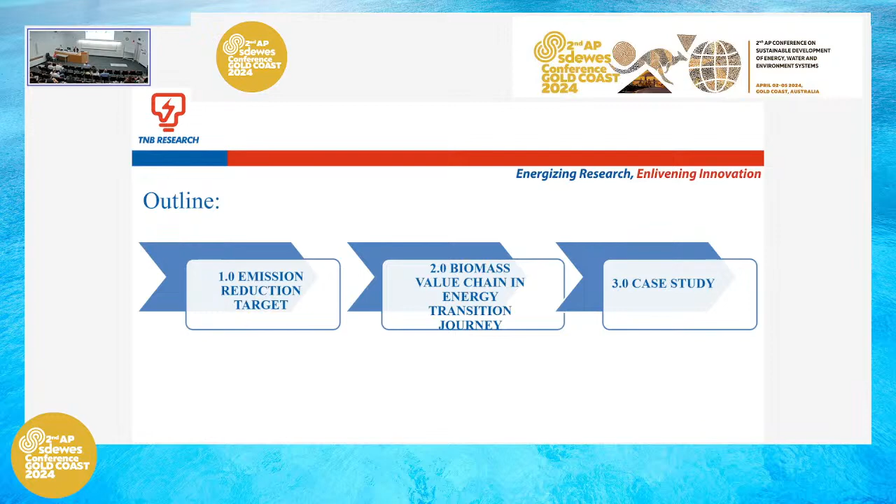Okay. Thank you, Prof. Navin, for the introduction. So I'm Suzana. I want to share today on the biomass value chain for the energy transitions. There are going to be three scopes of my presentation. First, I will talk about the motivations. What is the drive? What is the global and national target? And then I'll go through the biomass value chain perspective, specifically in the energy transitions, and then I will share about our case studies.

So we see now people are talking about climate change, the increasing CO2 being emitted. So more initiative strategies need to be done in order to prevent increasing rise of temperature and further to prevent emissions of CO2. Based on the IPCC report, we need to reduce 45% of these greenhouse gas emissions by 2030 in order to prevent an increase of 1.5 degrees Celsius.

So where are we now? We are 1.1 degrees Celsius above the pre-industrial level. Meaning that there needs to be a concerted effort and strategies globally and nationally in order to mitigate these emissions of CO2. And Malaysia also has made a pledge, a commitment to reduce the intensity of carbon emissions by 45% per GDP in 2005, in comparison by the year 2030.

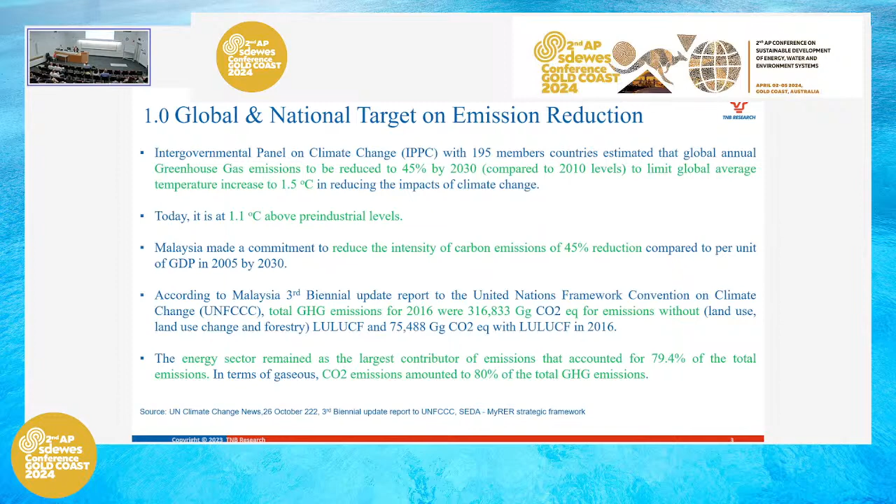So from a Malaysia perspective, we have to come up with roadmap strategies on how we can move forward to support this initiative. In the Malaysia scenario, the emissions of CO2 in gigagram CO2 equivalent, the energy sector is the largest contributor. So what I'm going to share today is the roadmap of Malaysia and how the industry combined effort to achieve the KPI, and I will give some light on the case study where we are positioning utilization of biomass as our power resource fuel.

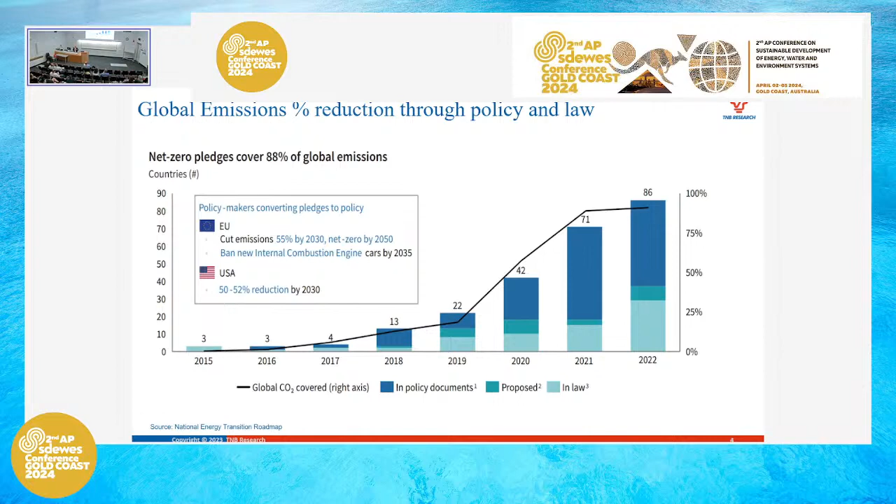Okay. We saw yesterday and today the talks on policy. When we look into these situations, it can be a bottom-up approach and also a top-down approach. When we talk about the top-down approach, the policy is important. In Europe and US also, there are certain targets to be reduced by a certain year. And this is where we see increasing policies being announced, implemented, as well as laws in order to ensure the target is met. So a global effort and strategy is very crucial to move towards net zero emissions.

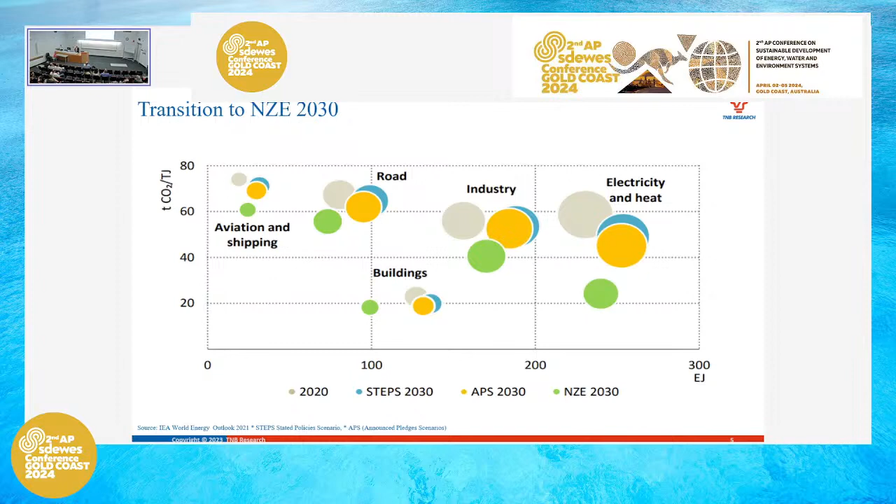So here we can see the importance of policy in shifting these reductions of CO2 emissions for all these sectors. We can see that more needs to be done, especially for the electricity and heat sector, where you can see that it takes the bigger chunk of the CO2 emissions. And here, with the pledged policies and announced pledges, with the implementation of all this, we hope that globally, in all these sectors, we will achieve a reduction in CO2 emissions and move towards a net zero target.

Right. So TNB, this is the company where I'm working. It is Tenaga Nasional Berhad. It is the main utility company in Peninsular Malaysia. So in Malaysia, we have East Malaysia and West Malaysia. So this company is the key, I think the prime player for utilities for the country. So the idea of moving towards net zero has been there since 2016.

So the company set specific targets for us to achieve, meaning that by 2025, they are introducing more renewables and their target capacity for renewables to be deployed. And also the company has subsidiaries, including a renewable subsidiary. And where I'm coming from, I'm from the research center that supports this energy transition journey for the company to meet their strategic directions. And then the target by 2035, because right now coal is one of our prime fuels used to produce electricity, they set a target that by 2035 they want to reduce emission intensity by 35%.

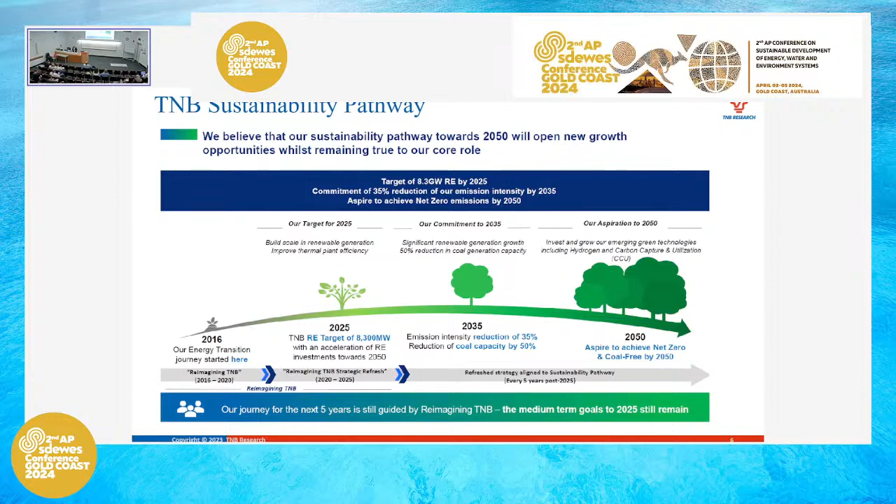Then how to do that? Meaning that utilization of coal is to be reduced by 50%. So then it prompts us to ask what alternatives there are to complement or fill the gap in terms of fuel supply. So this is where biomass comes in, because this is one of the approaches or solutions that can be offered in the short to medium term, as low hanging fruit. And then the long term is to achieve net zero and be coal free by 2050. So this is where technologies are important. We are exploring various technologies like CCUS and also other technologies such as hydrogen that can move us towards these directions.

Right. So as I mentioned, in the Malaysia scenario, strategy needs direction, right? So here, the country came up with the National Energy Transition Roadmap last year. With this, the government hopes to accelerate the transition from fossil-based to renewables. So they have in place the NETR, the National Energy Transition Roadmap, and also a National Energy Policy. So with these two governing umbrellas, this is where we go back to the question of which sectors we can further improve, or what will move the needle.

So here, energy efficiency is one of them and is very crucial, and also renewable energy in the mix, as well as starting to introduce hydrogen and bioenergy. This is where biomass comes in. So biomass also has a role in the energy transition levers for the country. And in order to ensure they are clear on what to do, they have positioned certain flagship projects. So in biomass, it is hoped that its utilization can create more industry and help increase job creation.

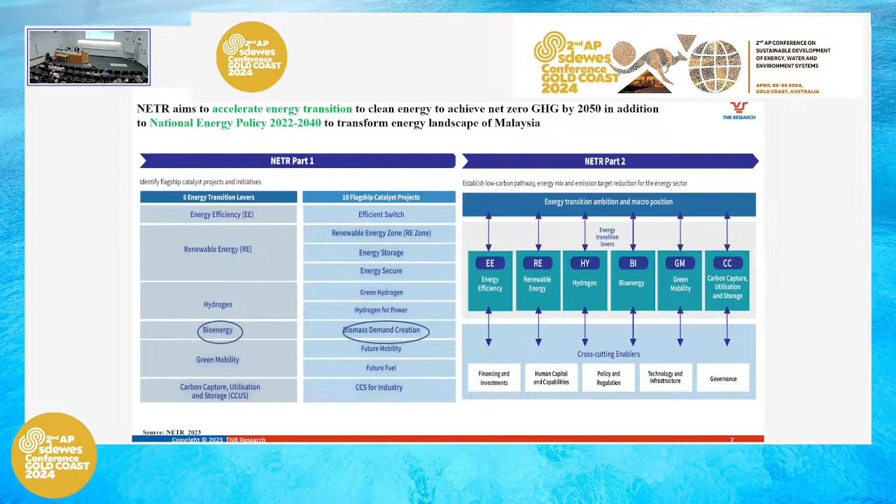Policies and regulations also need to be available and implemented, along with technology and infrastructure support, and also good governance. So from the Malaysian perspective, they see the need and importance of moving from fossil-based fuel to this net zero target. Right. So in order to make sure the aspirations and targets are clear, they have put KPIs. Under each target, there are certain KPIs to be achieved. For example, they compare these KPIs with 2018.

So now they expect that by 2040, and these are the targets in terms of percentage, with regards to energy efficiency, with regards to the installed renewable capacity, as well as reductions in coal capacity. So here we can see that the company I'm working with supports the nation's aspirations in order to move towards renewable energy.

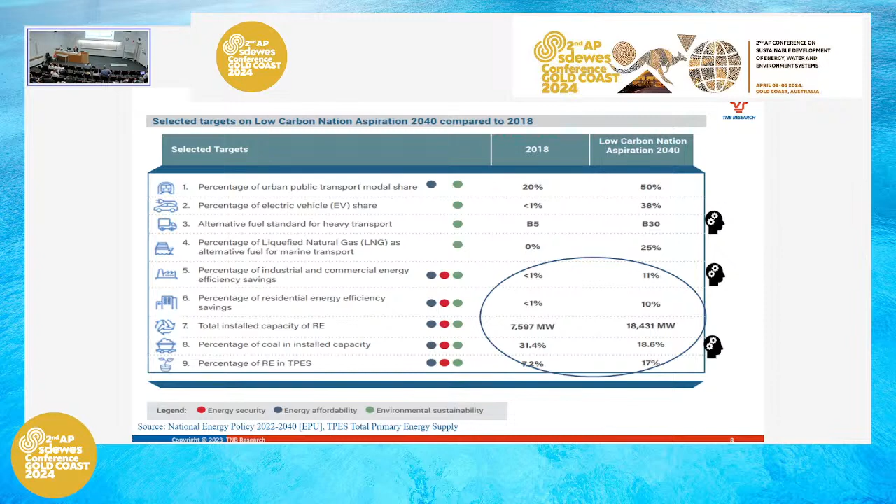So at the end of the day, three important items are being considered. That is, to address the energy trilemma in terms of affordability, sustainability, and also energy security. So these are the pillars that help to shape up the directions for the nation, right?

So we have come to understand that biomass can be converted to value-added materials. So we need the technology. This is where chemical and mechanical engineers and scientists can come up with the technologies, be it thermochemical conversion or biological conversion. All these technologies are important, but at the end of the day, when it comes to the industry, the key question they will ask is, what will be the dollars, and what are the value returns to them?

So at the end of the day, being from the academy and now shifting to the industry, I can see these are very important points that we as researchers need to have in the back of our mind. At the end of the day, dollars and cents matter. So there are many technologies there. For example, when we want to convert biomass to fuel, or biomass to other chemicals, we can leverage the nature of the biomass itself.

From lignocellulosic biomass, you can make bio-oil. Bio-oil you can use to produce fuel. Also from gasification, you can make syngas. So these are all bio-based products, right? And there are liquefaction technologies, where if you think about the liquefaction routes, you can handle biomass that is rich in moisture content, right? So it helps to reduce your technology costs in terms of biomass conversion routes.

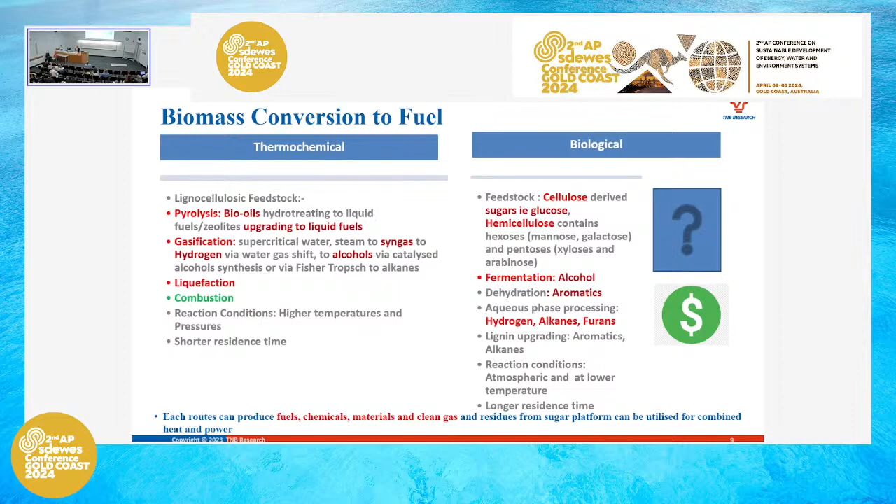And in terms of the biological route, we know that with biomass you can tap upon the lignin, the hemicellulose, the cellulose, right? So there are a lot of business models that you can derive from the biomass itself. For example, from the cellulose and hemicellulose base, you can convert it to a biochemical, or you can make it into a sugar-based product, right? So there are many offerings that biomass can offer. It's just that at the end of the day, we have to think about the dollars and cents when we want to bring our research to the market, right?

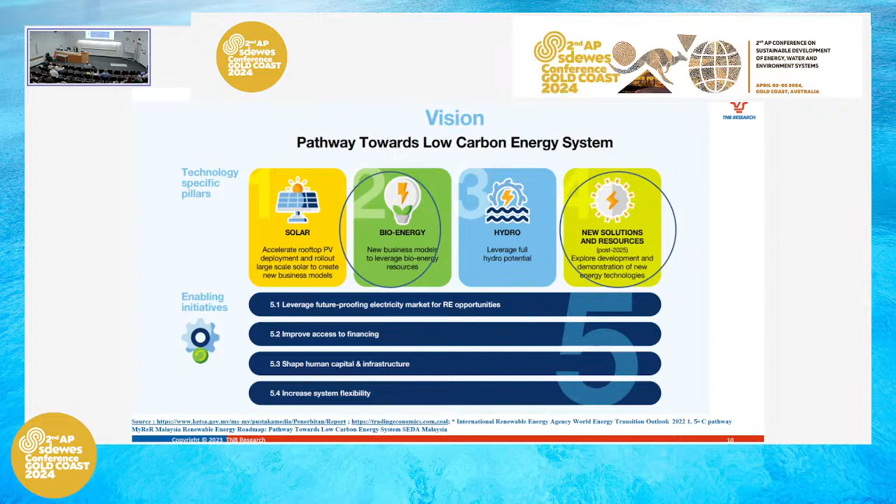And this slide is just to emphasize and share with you that in the energy transition roadmap, we are happy. For me, I'm happy that biomass has also been declared as one of the key initiatives for the nation. And they are also open to new technology demonstrations and new technology development for the country.

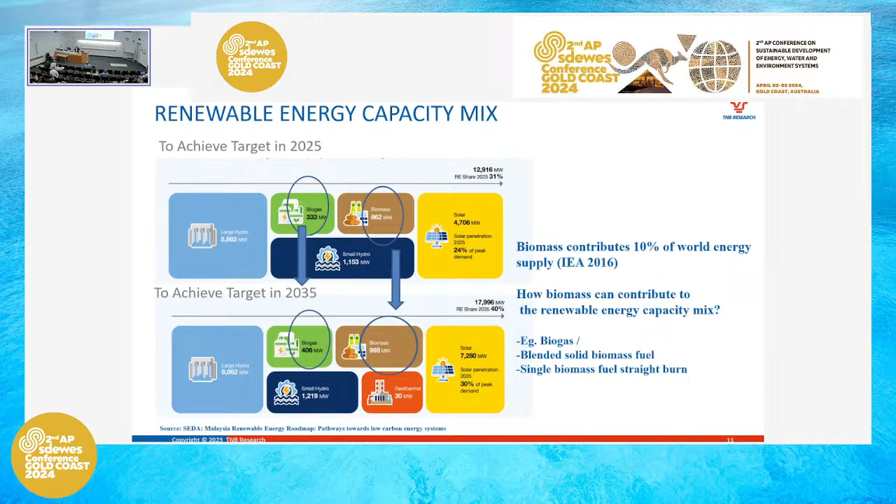And for biomass itself, the pie also increases from 862 megawatts for power generation, and they are targeting it to be 998 megawatts. So it begs the question for us as an energy company, how are we going to help them realize this? This is where a lot of research and assessment has been done to ensure that the biomass quality we're going to supply for the co-firing initiative meets the target, because we know that the design of a boiler is very specific to cater to different types of fuel. So this is where the research comes in, right?

Okay, so just to give some insights, in Malaysia there's a lot of agriculture. So, yeah, we have lots of palm trees, we have cocoa, we have sago, right?

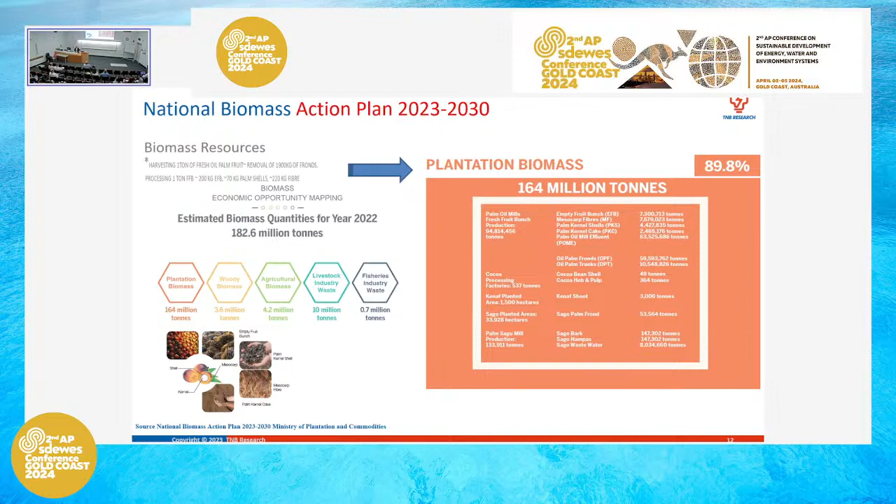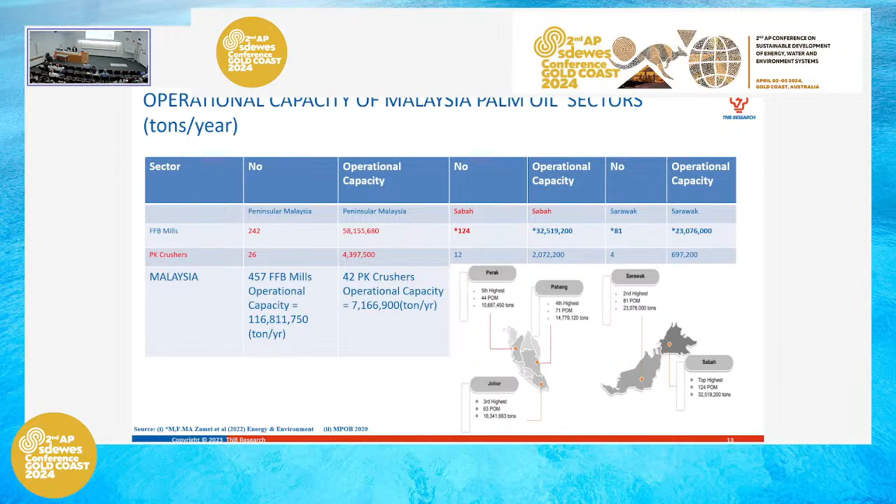As I mentioned, when we talk about biomass, one of the other things is the business model, because the working committee preparing this national roadmap also put thought into how we are going to position it: is biomass 100% for fuel, or are we going to prioritize high value added commodities? So they did a study, and when they want to turn biomass into a business model, at the end of the day, dollars and cents are important.

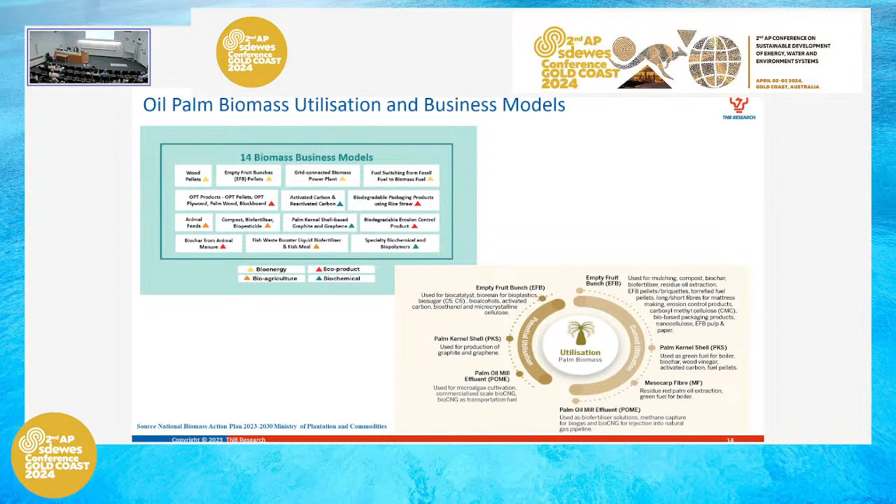For example, if biomass is to be used to replace coal, the ceiling price is the coal price. So to make this business attractive, they need to give us a window that is lower than that. Then we can see the added value of introducing biomass as a fuel, knowing the quality is there, the pricing is there, and it won't damage our boilers, which is very important, because if our boilers are not operating, there's a cost the industry has to bear. So we are very cautious in accepting this type of fuel.

So back to the biomass value chain. To me, when I think about the biomass value chain along the energy transition, it makes me think about the SDGs. When I map it against the SDGs, it means that from the feedstock supply itself, we can add value. Why do I say that? Because if we don't tap the biomass, normally they just leave it in the plantations, and it will rot there and emit methane. There's a certain percentage of the EFB you can put on the plantation to enrich the soil, but the balance, what are we going to do?

So this is where we have to think about how we're going to utilize this biomass to add value to it. This is where SDG 12 is very important, meaning responsible consumption and production - whatever you produce, you have to make sure you treat it and handle it responsibly.

Now we have the feedstock, so how are we going to add value further? This is where biomass processing is very important - the technologies like gasification, pyrolysis, liquefaction. When these technologies are developed by researchers, you transfer that IP to the industry.

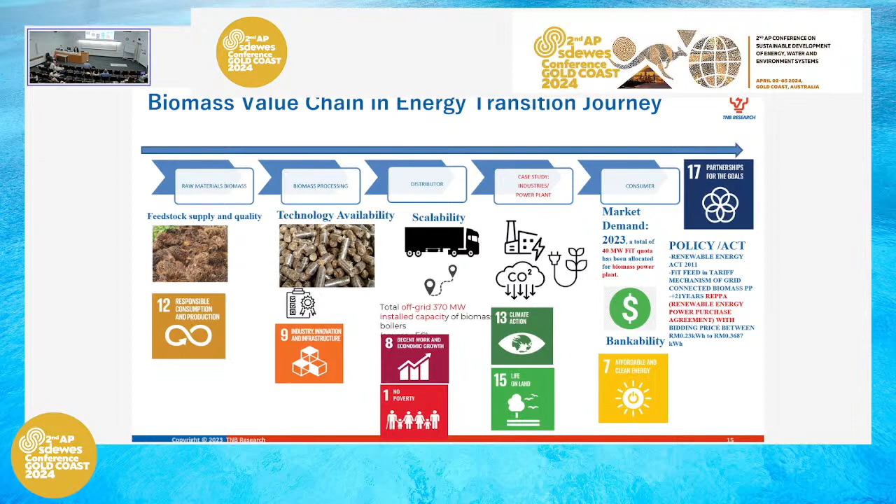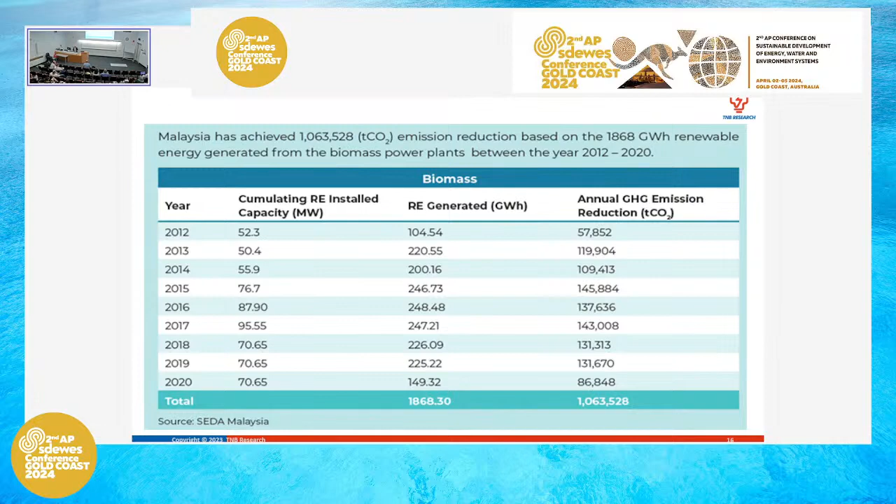So meaning that biomass, even though it's not the major portion, plays a role there. But as I mentioned, when we talk to the industry, it's not without challenges back there.

As I mentioned, in order to convince them that you've developed good research, say this solid fuel is very close to coal, it's not that easy, because I can see this now that I'm at this site with the industry. We have to ensure the homogeneity, the stability of the supply, and the stockpiling, because when they want to replace coal with biomass, you can imagine tonnage upon tonnage needs to be there, and they cannot afford a day without this fuel being there. So the feedstock quality is very important.

So for young researchers out there who work on biomass, these are the things we have to bear in mind when we develop the solid fuel - we have to know the industrial standards, so straight away you know your product can meet the market very early.

Also on technology readiness, because when we talk about biomass, the scale is like below 100, below 200 megawatt. So how can we shift this to become 500 megawatt? For example, in one of our boilers, we need 1,000 megawatt. So how can we shift and move towards using biomass alone? It's a journey, but at least I'm happy now the idea of introducing biomass as co-firing is there.

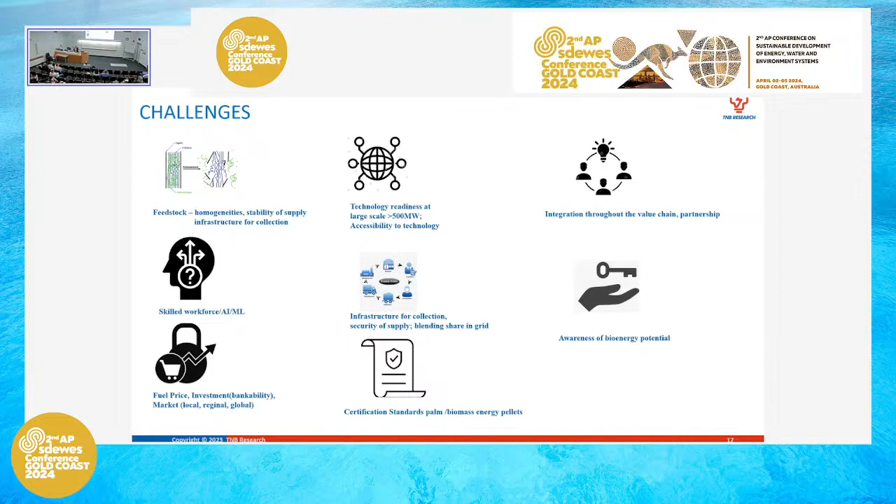And then awareness on bioenergy potential - yes, it's there, but we need more. And certification of standards, because most standards now refer to wood pellets, which in terms of properties are different in nature from biomass. So this is where I hope more research can be done, in order to develop certification standards that meet the industry requirement.

So these pictures I have here, this is where I am, and somewhere up here is where we do the co-firing of the biomass. We tested it in the industry, at one of the power plants there, where they introduce the biomass pellet - it's in pellet form.

It's transferred to us in the jumbo bag here, and introduced through this funnel into the storage bin, then passes through this conveyor belt, and meets at the mill. Each of the boilers has its own mill with the coal line, and here they transfer the biomass line, and they also have the line for the coal, and it mixes together in the mill and then gets grinded.

For processing of biomass, they need to achieve a certain particle size, about 75 micron, and it has to meet certain process requirements in terms of moisture conditions. You have to monitor the mill outlet temperature and mill inlet temperature, because the moisture of the biomass will affect the performance of the mill.

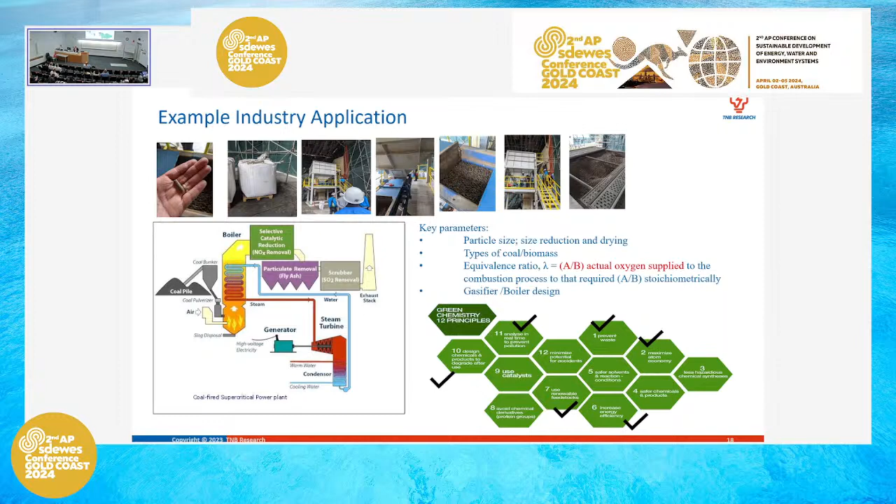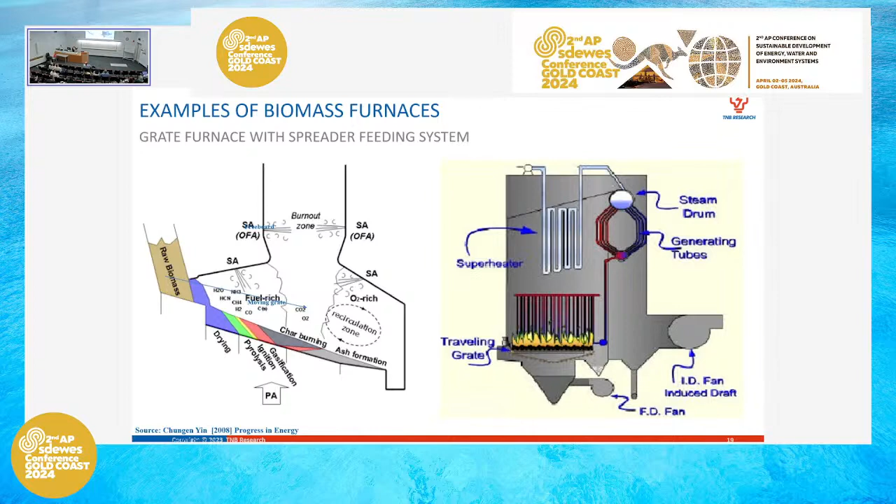This slide shows the role of biomass that can be used and introduced in the utilities company. That system is in the utilities company, but in Malaysia our boilers are of different types. When this biomass is used in the palm mill itself, you can see different outcomes. The principles of chemical engineering, optimizing air fuel ratio, still apply, but the fluid dynamics and mechanics differ due to the different natures of technologies that need to be considered.

This slide emphasizes that when dealing with biomass, optimum biomass quality is important, because we need to ensure it helps improve combustion efficiency and helps avoid microbial degradation. This is where, when we talk to industry, they ask: if you have biomass in portions of our coal yard, how do you ensure the biomass will not degrade or be attacked by microbes?

In one case, you saw the biomass being put in a jumbo bag, then used straight away. In another industry I visited, where I had to do testing for their trial burn, they put up a shade, placed the biomass under it, and allowed it to sit for only certain days, because in our country it's a very rainy season, which also has to be considered to ensure quality is maintained.

The calorific value, the CV value, is also very important, because certain boiler designs are made to accept certain CV values. When we want to introduce biomass, we have to consider these CV effects. In our case studies, we find you need more biomass to achieve the specified CV for that boiler, due to the low CV value of the biomass itself.

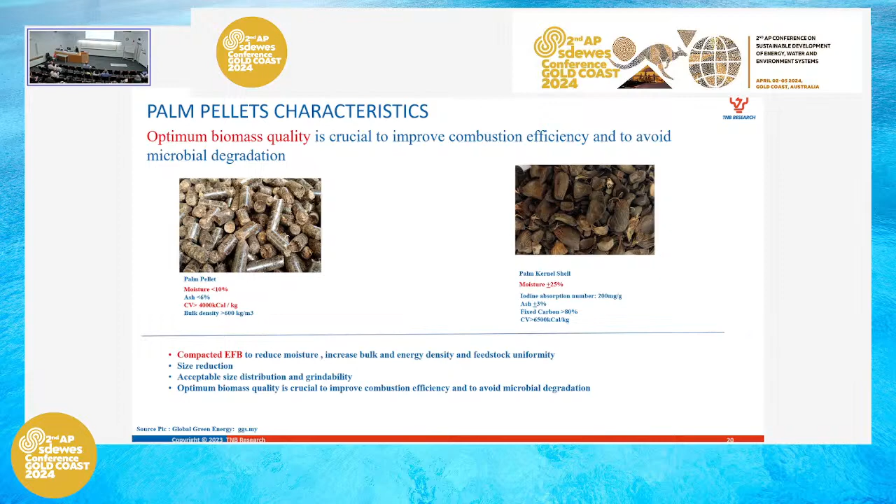At the moment, these are the standards being referred to. We don't yet have our full standards developed in Malaysia.

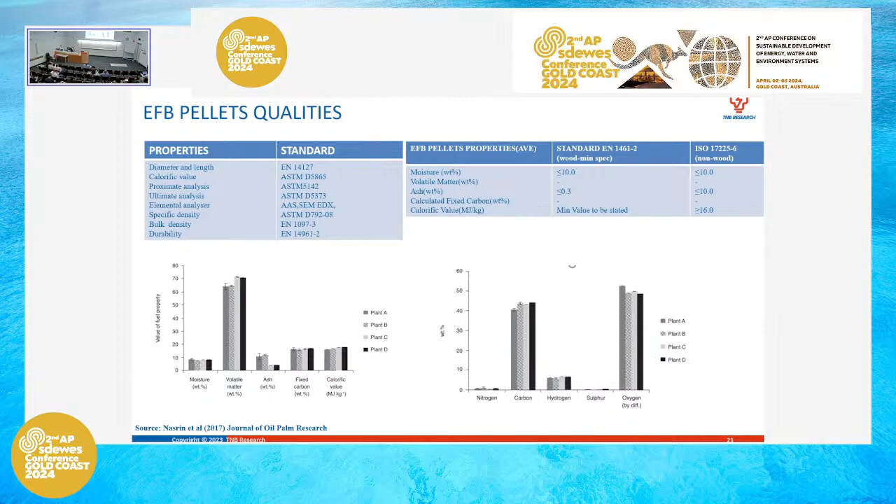This is still based on ASTM and EN. And then they managed to maintain moisture level, volatile matter, ash. There's a slight deviation, but still acceptable. So this is a guiding factor in order to introduce the biomass to the boiler.

But when we talk about introducing biomass to utility companies, their concern is on these compositions. They know that biomass has higher potassium, calcium, magnesium, chlorine. So what are the mitigations? How can you give them confidence to accept your biomass?

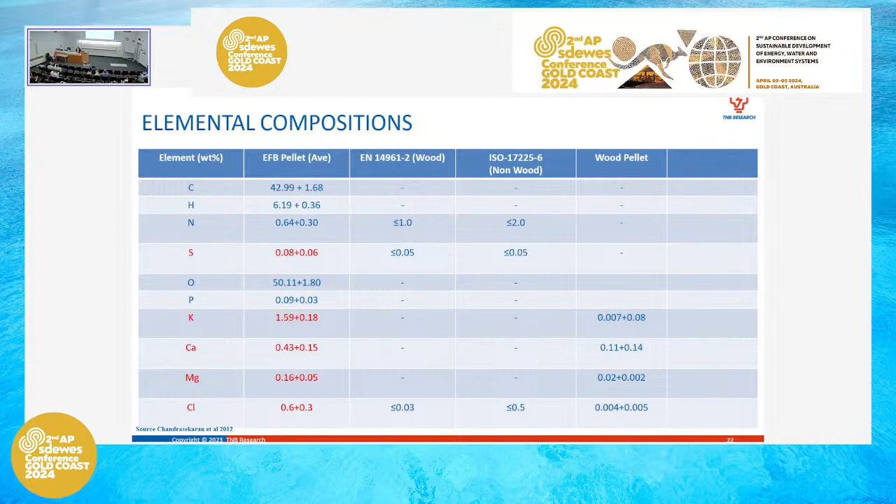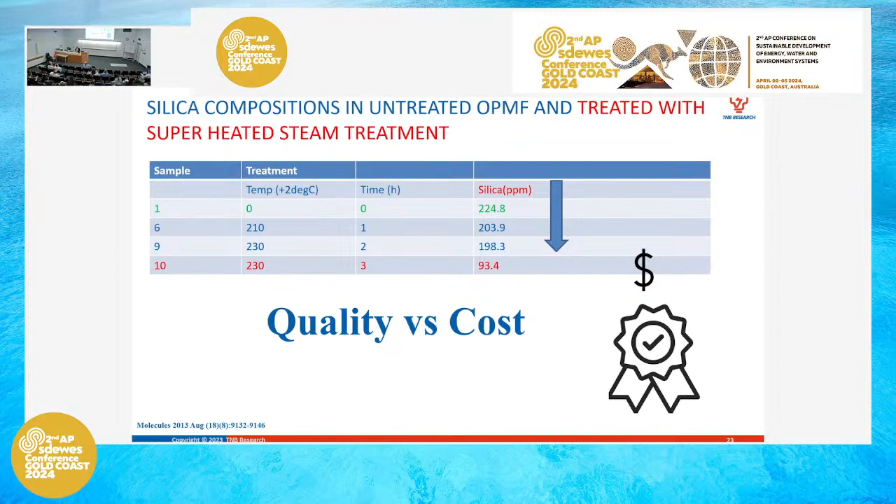So this is where research has been done, where washing of biomass plays a role. Meaning that they wash the raw biomass to get rid of the potassium and calcium. And from here, they find that the silica content is also reduced, meaning that you get a more quality fuel. So at the end of the day, we have to bear quality versus cost. The trade-off between these two needs to be considered.

Okay, so that is some background. This is to share about our case study. This is work sponsored by JST from Japan. It is a collaborative work between our research center, Curtin University, Australia, Kumamoto University, Japan, and also Chulalongkorn University, Thailand. So I'm going to present the findings from our group.

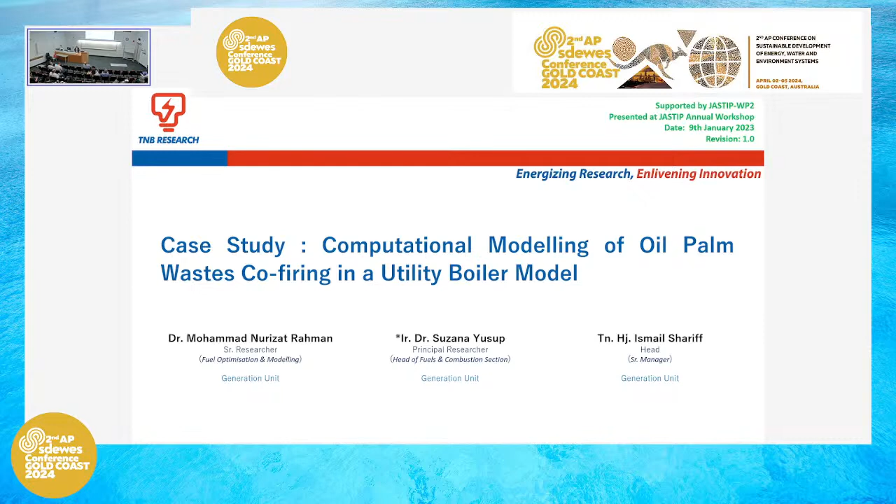So what we have done here is CFD modeling, because the industry wants a feel of what happens if we introduce the biomass. How is the heat distribution? Because they will get a penalty if their heat rate is not as per their power purchase agreement. So we introduce CFD to give some feel of what will happen if they introduce biomass in their boiler.

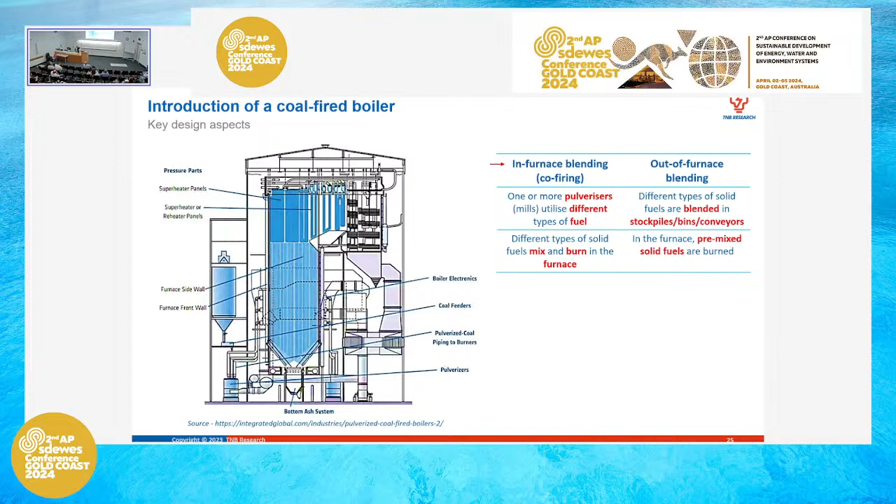In principle, when you want to introduce biomass to the boiler system, it can be through on-belt blending, because you have a conveyor belt that brings the fuel up to the mill, or you can have in-furnace blending. In-furnace blending means you have certain burner rows, so you can introduce a certain type of fuel at a certain burner level. In our case, we assume the biomass is introduced by in-furnace blending in one of the burner levels.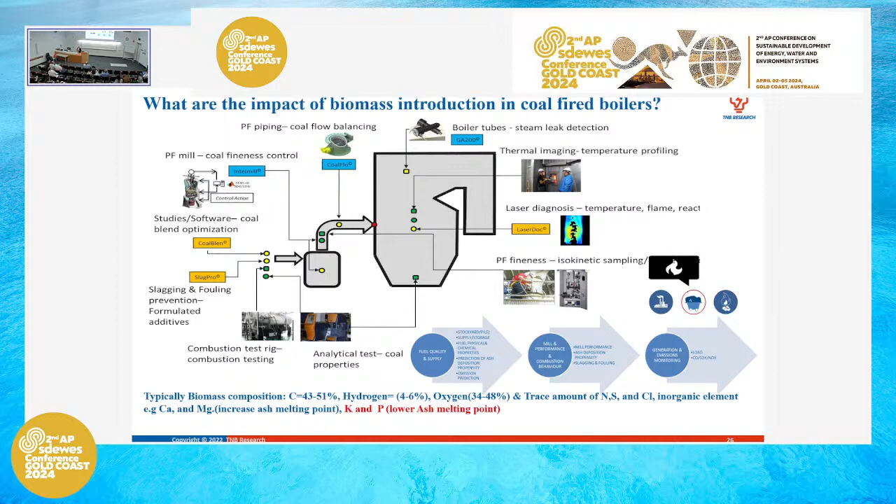When this idea is put forward, the questions from the performance engineers in the industry are: what is the impact? Will biomass affect slagging and fouling? What about the fineness? Can biomass be ground to certain HGI levels like coal? And how will our mill work? Monitoring mill performance is very important, so they know the fuel quality fed into the boiler won't do much damage.

So in our case study, this is how we introduce the system. We put propositions. Let's assume you have six burners, and six mills. We introduce mill A for the biomass, do the co-firing, and want to see the extent of the emissions and the unburned carbon. This is what we're trying to generate from the CFD.

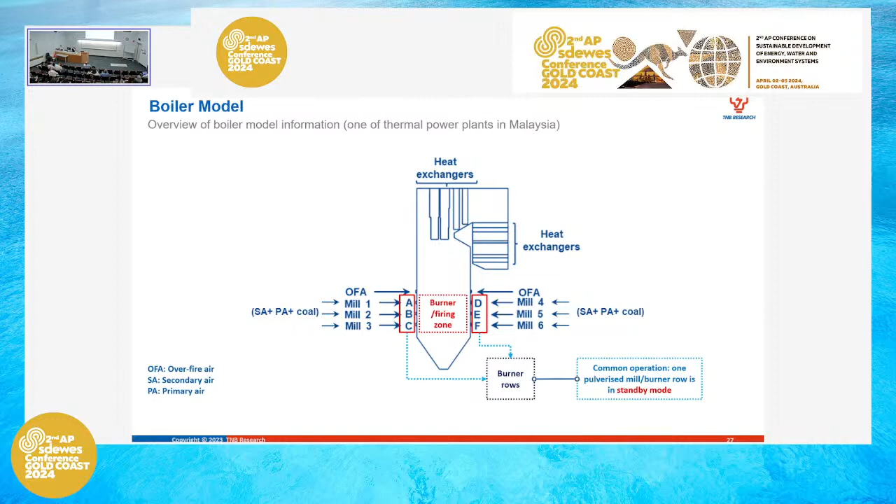With that, we map against the biomass quality in terms of its proximate and ultimate analysis. It shows us that the biomass we want to handle is okay, because the ash percentage is lower compared to coal. That is our first confirmation of the fuel quality. And from here, we know the risk is lower, because although it has inorganic materials, based on these percentages we assume low slagging and fouling, and low fuel rejection limits.

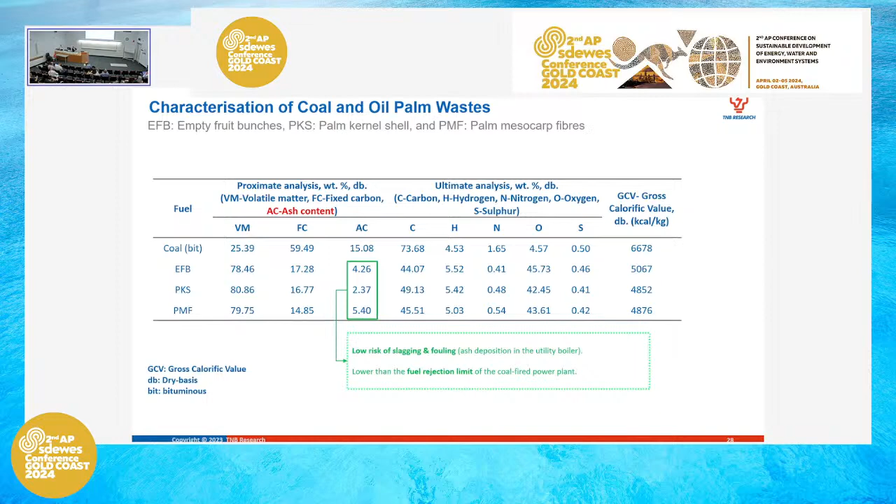So we are based on this. From there, we moved, and then we put the assumptions here. As I mentioned, we introduced empty fruit bunch, palm kernel shell, palm mesocarp fiber. What if we blend it at 20% calorific value? The rest is the coal. We assume it's bituminous coal because one of the power plants here is using bituminous coal.

And then from there, we ensure the fineness of the oil palm waste is within the range, same as the coal. And then we calculate how much they need to allow this biomass to pass through per mill. So with this, you can imagine how we can spur the value add of biomass in terms of the business there, in terms of SMEs there. Because the average processing tonnage per mill is about 38 tons per mill. But for the 24-hour operation, single coal firing, you need about 4,560 tons of coal.

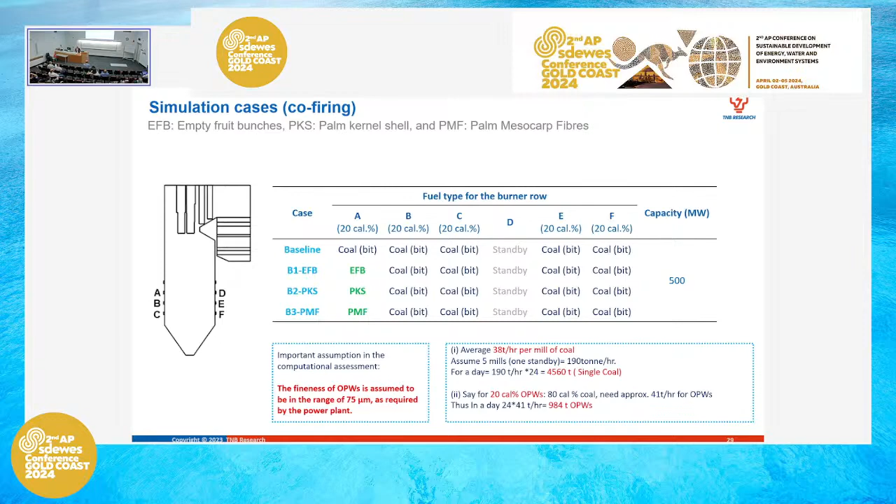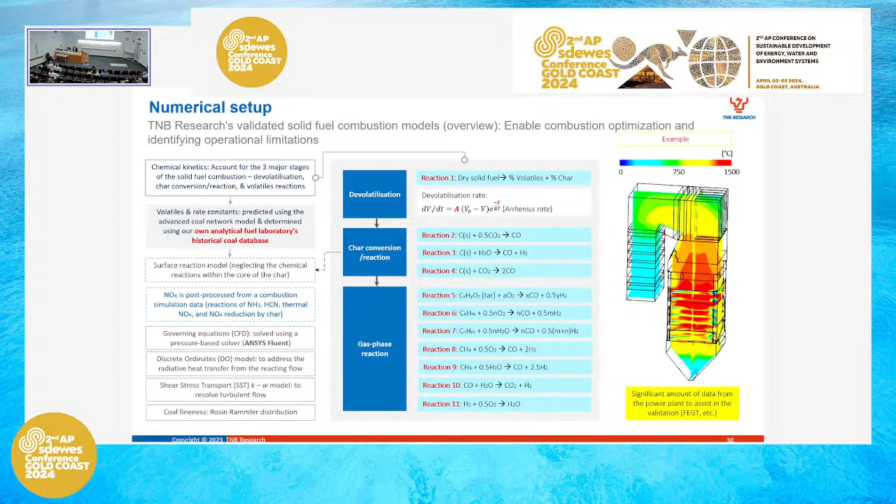But if you introduce the biomass, you need to make sure your biomass is available. It's about 984 tons of oil palm biomass waste. So if this works, it helps to spur the industry, right? So what we do, basic mathematics there, we apply CFD, where here we use ANSYS and also Fluent. So we do the modeling, and from there, these are the results that we obtain.

So the first question that comes to us is that we are monitoring this temperature here. This is very important because this portion is called the nose area, where when you introduce the solid fuel, the temperature should not exceed this amount. So when we check this, we find that the temperature is a bit higher. So with oil palm waste, why is this behavior? We attribute it to the high volatile matter inside the biomass itself. In order to avoid slagging and fouling, this temperature should not exceed that.

So with this, we are proposing to them, you cannot introduce this biomass with bituminous coal. You can do this, but you introduce the biomass with sub-bituminous coal, meaning higher VM value. Then you can start to control this temperature so that it still meets their design limits. So this is one of the findings. These are the insights that we translate to the power plant.

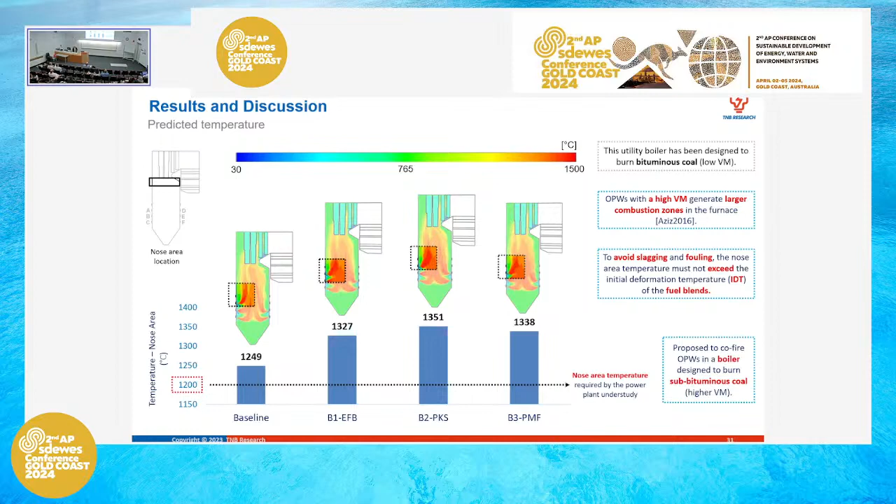And then another parameter that the plant is monitoring is the unburned carbon. Unburned carbon means the leftover; if you have not optimized your combustion in terms of your air-fuel ratios, then you're going to have high unburned carbon, which is not good. So in this case study, our result is good news to them, because the unburned carbon is less than 6%, which is their limit. So we tell them, you can do this with biomass.

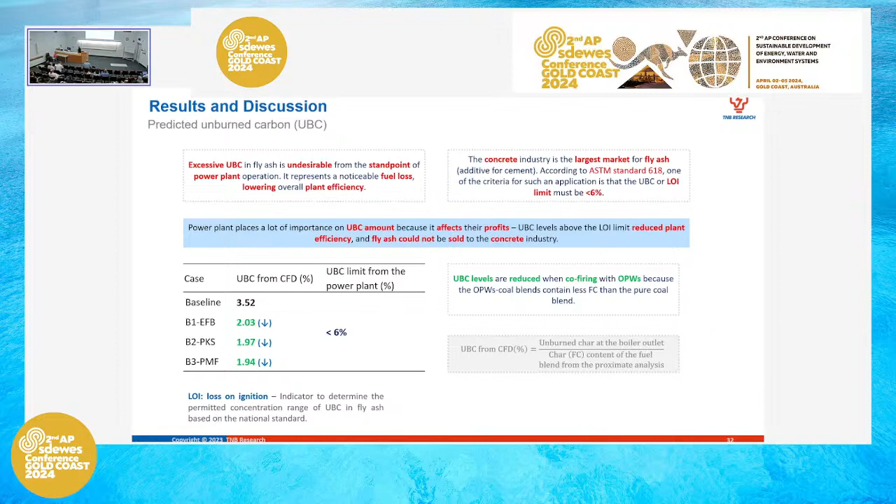Because your unburned carbon is lower than 6%, you can also sell your fly ash, because the fly ash must meet the 6% limit, right? So then you have additional income. If you still co-fire your biomass, you can still have that value added. And then we check in terms of the fuel flow.

I have that? Okay, okay. So, okay.

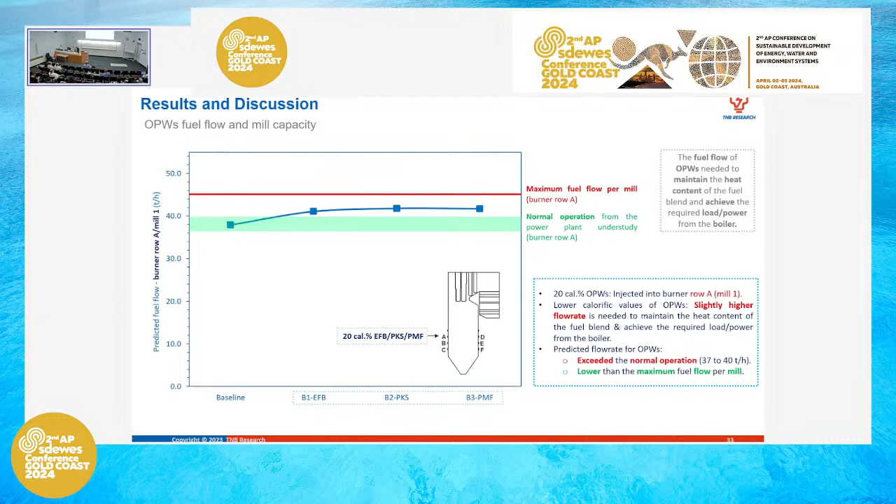So at the end of the day, with the findings, we believe that we have given them some assurance that yes, biomass has a role to play. It helps to reduce their emissions. It helps their boiler performance. So this is more to gain confidence for them.

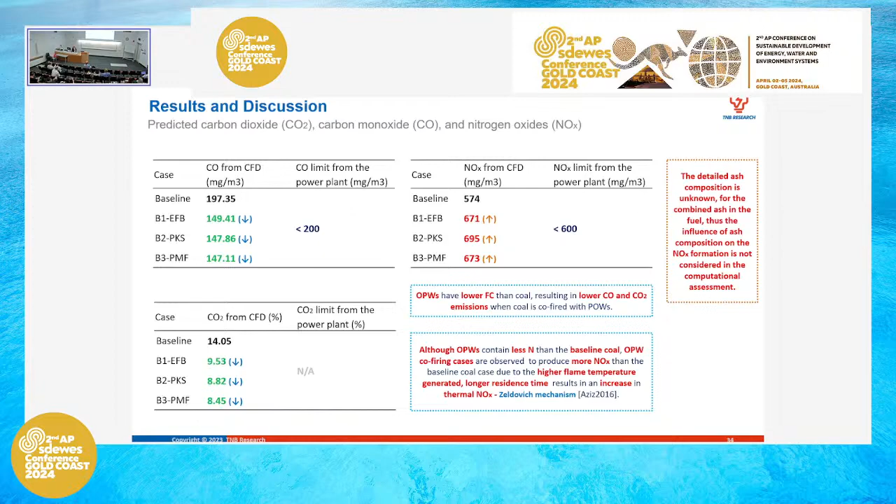Due to the time limit, another case study is a similar approach, but we are testing with different types of biomass. So allow me to just get to the final slide for the other parts, where we introduce different types of fuel, because we want to check how different the findings are from before.

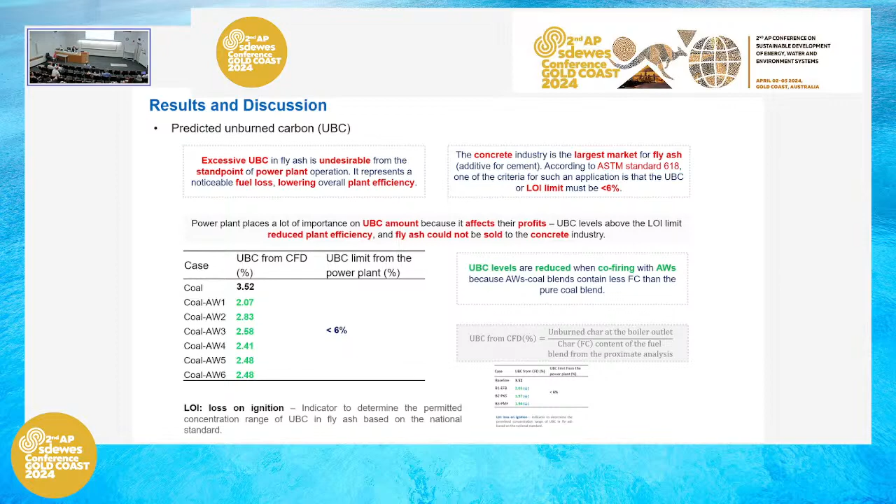So here it also gives a convincing result. So this biomass is a sagu waste. And remember, in Malaysia we have lots of agriculture, palm-based, sagu-based, right? So the sagu-based also has given a positive impact in terms of co-firing in the boiler, right?

So at the end of the day, my key point here is we are not only doing the monitoring for the combustion performance, our team is also doing AI machine learning data analytics with regards to the soot blowing optimizations for the power plant. And also we do some crack detections for the power plant in terms of the smart algorithm. And we do it for both coal-fired power plants and also gas-fired power plants.

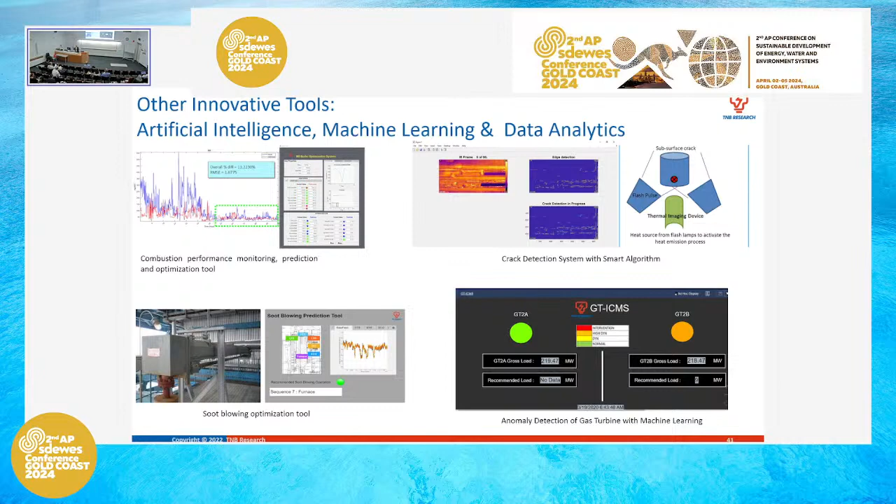So I think with this, I hope I've enlightened you on the potential of biomass as value-added new feedstocks, in order to help us move towards the energy transition bit by bit, and make net zero happen. With that, thank you.

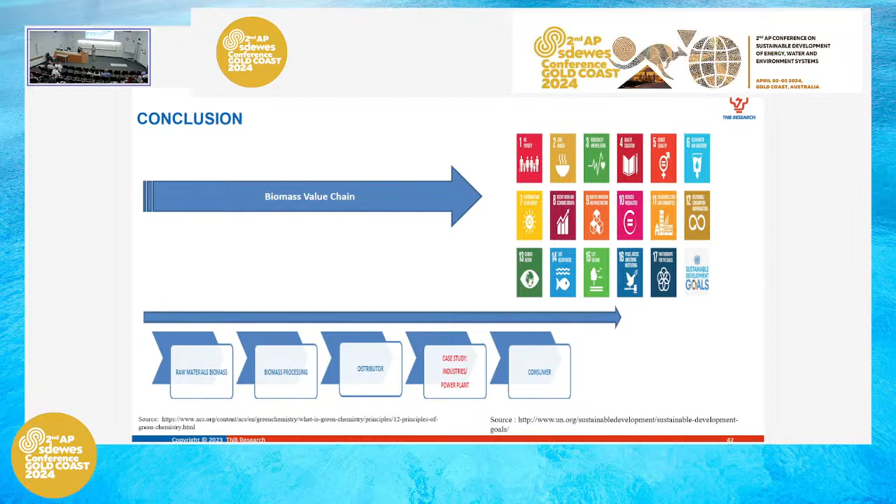Okay, before I open the floor for discussion, I have my own question. In Europe, we have a problem with seasonality of crop biomass. Is it also a problem with empty fruit bunch seasonality, or is it flat during the year? I think it is seasonal as well. But then they make a stock availability, meaning that they must ensure that there's a stock there, so that you don't have a time with no stock at all.

Meaning, that type of biomass is going to have chemical processes because it's not dry. So bacteria, if you keep it somewhere in large quantities, you will get the methanation process. Correct. So that's why, if you want to make it a fuel, this is where the costs come in, because they need storage and fuel upgrading to meet the quality requirement.